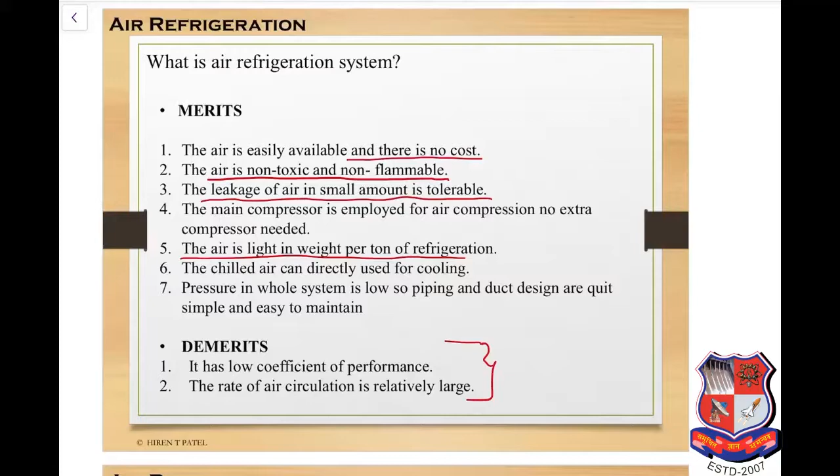So these are the merits and demerits of air refrigeration systems. Now there are different kinds of air refrigeration systems available. From the syllabus point of view, 6 systems are important: first, simple air cooling system; second, simple air evaporative cooling system; third, bootstrap air cooling system; fourth, bootstrap air evaporative cooling system; fifth, reduced ambient air cooling system; and sixth, regenerative air cooling system.

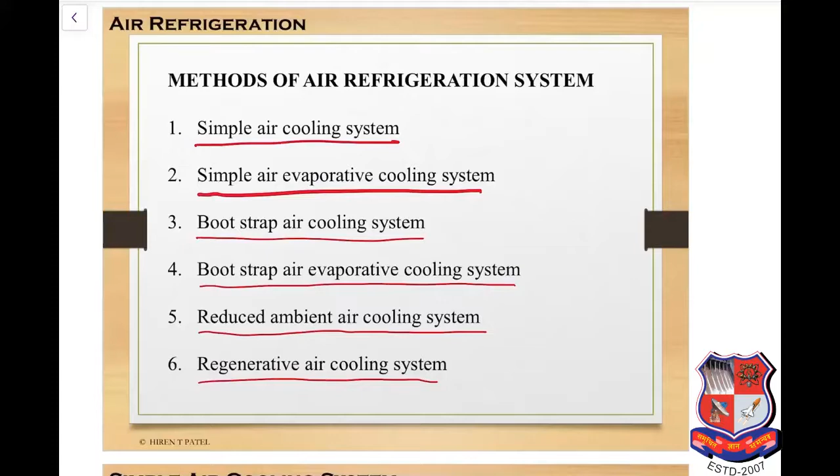The air required for the refrigeration system is bled from the main compressor. First, ambient air is passed inside the system, which is compressed by default in some amount, and that air is known as ram air. After that, air passing from the inlet goes to the main compressor where it gets compressed. From that air, some is bled to the combustion chamber and the remaining air is passed to the rest of the system.

The air which goes into the combustion chamber combusts there and passes to the gas turbine, where its pressure is reduced, so the work output can be obtained from the gas turbine, and that work is directly utilized for running the main compressor. The remaining air passing from the system is first passed to the heat exchanger, where it gets cooled by the ram air which is bled earlier, rejecting its heat to the ram air, and then forwarded to the cooling turbine.

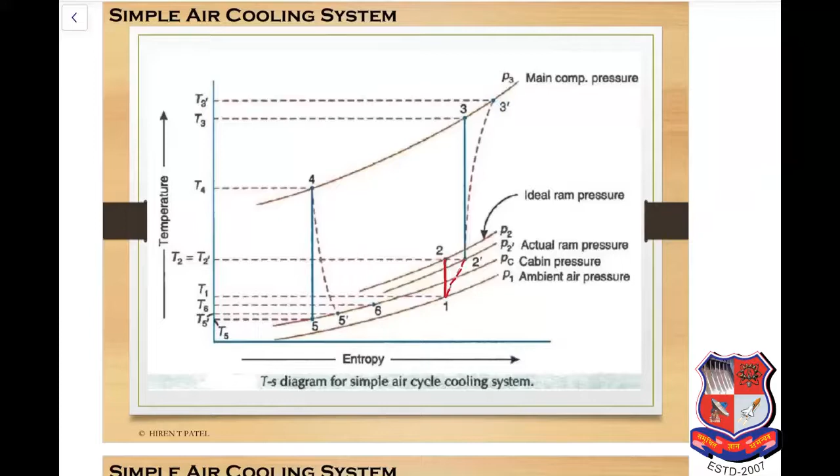From 2 to 3, this is the main compression process. So 2 to 3 is isentropic compression, during which there is no heat transfer. And for compression efficiency, there is 2 to 3 dash.

Then 3 dash to 4, that is the heat rejection process, which occurs in the heat exchanger. So in heat exchanger, 3 dash to 4 is heat rejection.

4 to 5, that is expansion in the cooling turbine. So 4 to 5 is isentropic expansion, and if there is isentropic efficiency of cooling turbine, then it is 4 to 5 dash. And 5 to 6 or 5 dash to 6, point 6 is cabin pressure and temperature. So here we can see the full cycle process: 1 to 2, 2 to 3, 3 to 4, 4 to 5, and 5 to 6.

Now each and every component has its own work. In the ramming process, if there is any efficiency, so it is not perfectly isentropic, then what happens? The temperature remains constant, but the pressure will be different. So instead of ideal pressure, there will be some actual pressure which is comparatively low than the ideal pressure.

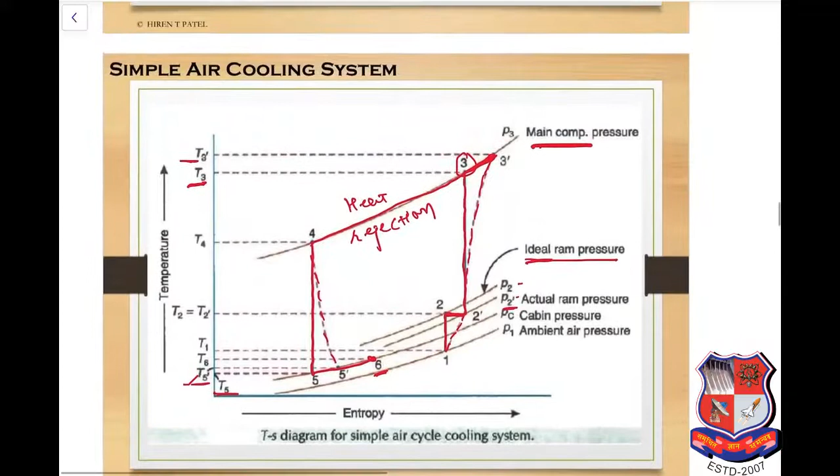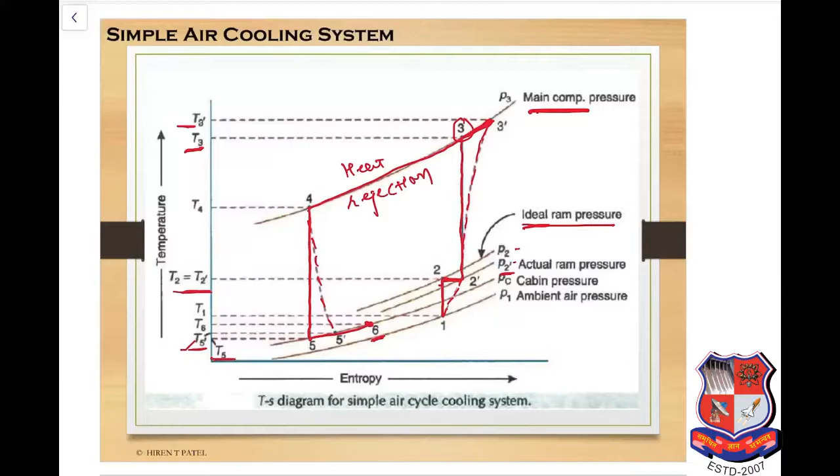Now as we have seen on the TS diagram that T2 is equal to T2 dash. So if there is ramming efficiency, then temperature remains same, only pressure will change. Remember, it is only for the ramming process. So T2 can also be written as T2 dash, and T2 by T1 can be replaced by T2 dash by T1. So T2 dash by T1 is equal to 1 plus v square by 2000 Cp T1.

Now we know that Cp minus Cv is equal to R, so we can derive the equation for Cp as well as Cv. Here we are deriving the equation for Cp, that is Cp is equal to gamma R upon gamma minus 1. You can see the process.

So putting this value of Cp into the equation, we are having T2 by T1 or T2 dash by T1 is equal to 1 plus V square gamma minus 1 upon 2000 gamma R T1, when R is in kilojoule per kg, when R is in joule per kg Kelvin. Now if we take R in kilojoule per kg Kelvin, then the equation becomes 1 plus V square gamma minus 1 upon twice gamma R T1.

Now, as we know, velocity of sound, that is A, is equal to under root gamma R T1. So gamma R T1 can be written as A square. So our equation becomes 1 plus V square gamma minus 1 by twice A square.

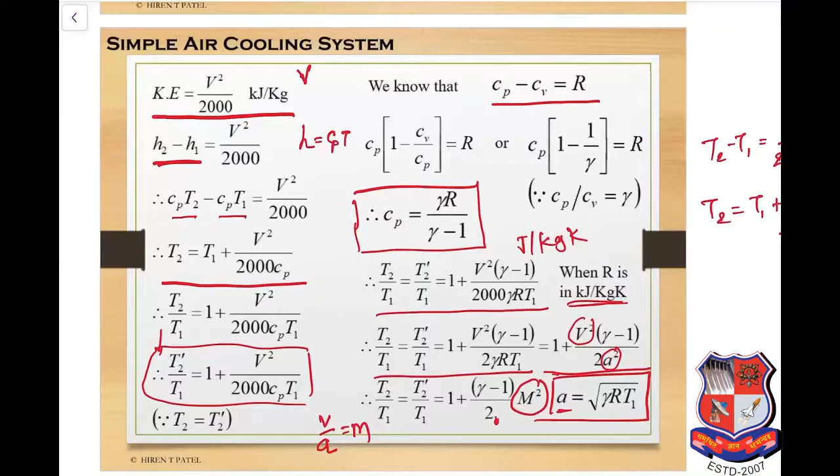So the efficiency of ramming process can be written as P2 dash minus P1 divided by P2 minus P1.

Compression work can be written as MCP delta T, that is equal to MACP T3 dash minus T2 dash. And turbine work which we are obtaining, WT is equal to MCP delta T, that is MCP T4 minus T5 dash. Heat rejected during the process 3 to 4, that is MCP delta T, that is T3 dash minus T4. And refrigerating effect produced or heat absorbed, that is MCP delta T, MCP T6 minus T5 dash.

So COP can be written as refrigerating effect divided by work supply, that is MCP T6 minus T5 dash divided by MCP T3 dash minus T2 dash. So T6 minus T5 dash divided by T3 dash minus T2 dash.

Or COP can also be written in this manner. If capacity is given, then it is written as 210Q divided by MACP T3 dash minus T2 dash, or MACP T3 dash minus T2 dash is also power into 60. So power is equal to MACP T3 dash minus T2 dash by 60 kilowatt.

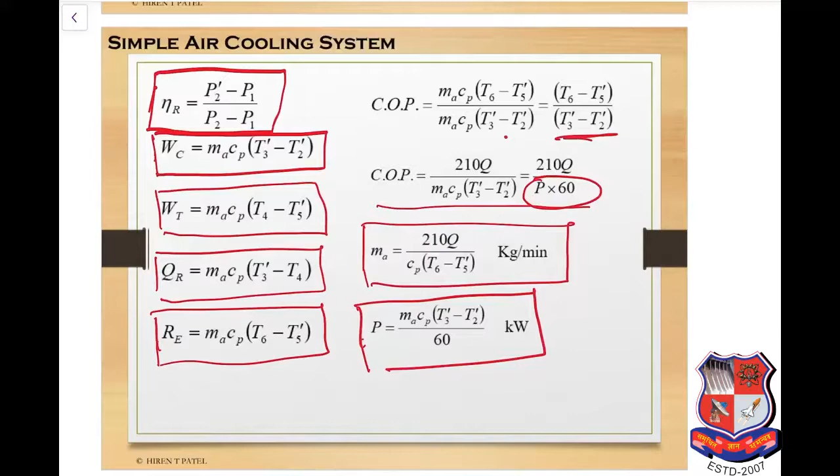Now the second system is simple air evaporative cooling system. There is no much difference between simple air and simple air evaporating cooling system. If we can see here, the whole diagram is same. The simple air cooling system as well as the simple air evaporating cooling system, both are nearly same.

Only the difference is the introduction of evaporator in between the heat exchanger and cooling turbine. So the additional cooling is produced by this evaporator after the heat exchanger before entering the cooling turbine. So air before entering the cooling turbine loses its heat in the evaporator. In the evaporator, some different kinds of evaporative medium or material is provided for the additional cooling purpose.

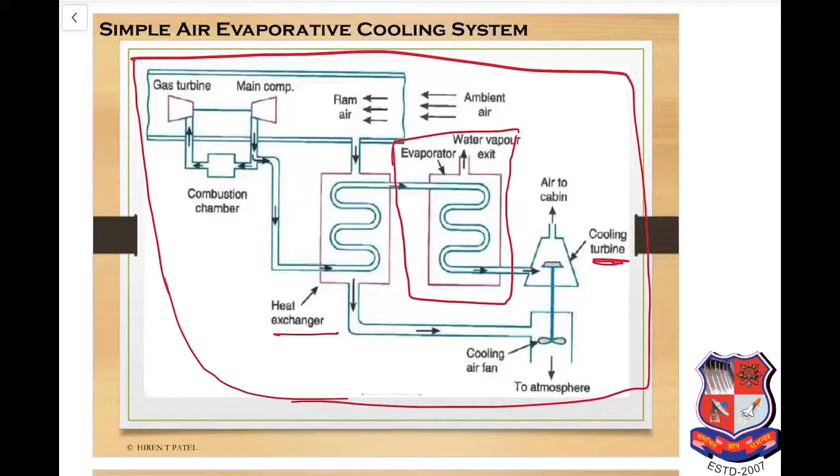So the additional heat is rejected inside the evaporator. So in the TS diagram there is also not much difference. As we can see, the TS diagram is nearly the same as simple air cooling system. Only the difference is that our point 4 is extended to point 4 dash. Here we can see that 4 to 4 dash, that is the additional cooling or additional temperature lowering, or we can say additional heat loss inside the evaporator. So here this process is denoted by 4 to 4 dash.

So earlier in simple air cooling system we are having temperature T4 after the cooling of air inside the heat exchanger, but after introducing the evaporator we are having T4 dash. So the temperature is reduced from T4 to T4 dash. So ultimately we are having less temperature at T5, or we can say T5 dash, compared to the simple air cooling system.

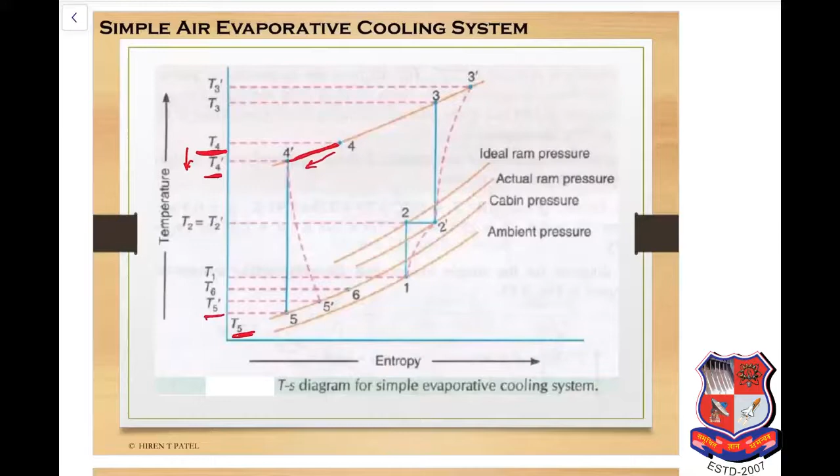So in simple air evaporative cooling system the difference is only that the temperature we are obtaining is less before entering the cooling turbine. So air has less temperature compared to simple air cooling system before entering the cooling turbine. The equations for COP are same as simple air cooling system, and mass of air required is again same as simple air cooling system.

Also, the mass of evaporant medium that is required before starting of the flight is equal to QE into T by HFG, where QE is the heat to be removed in evaporator in kilojoule per minute, T is the flight time in minutes, and HFG is the latent heat of vaporization of evaporant in kilojoule per kg. So only latent heat is rejected. Additionally, we have to remember the mass of evaporant required inside the evaporative system instead of MA, where MA is the mass of air required for cooling inside the cabin.

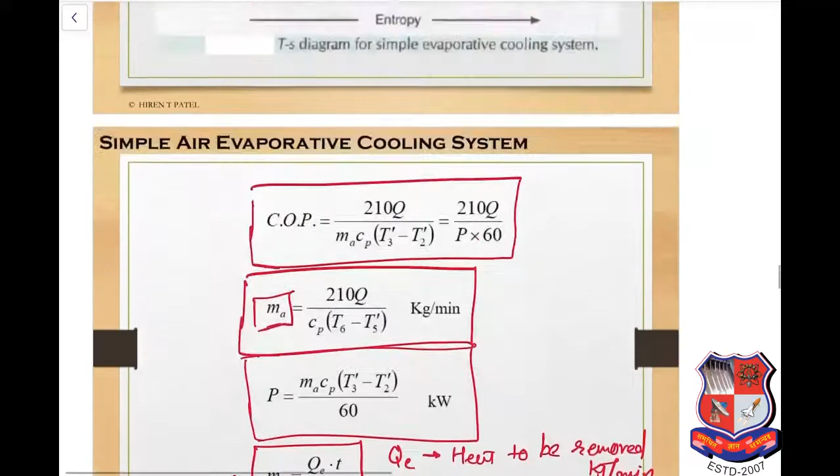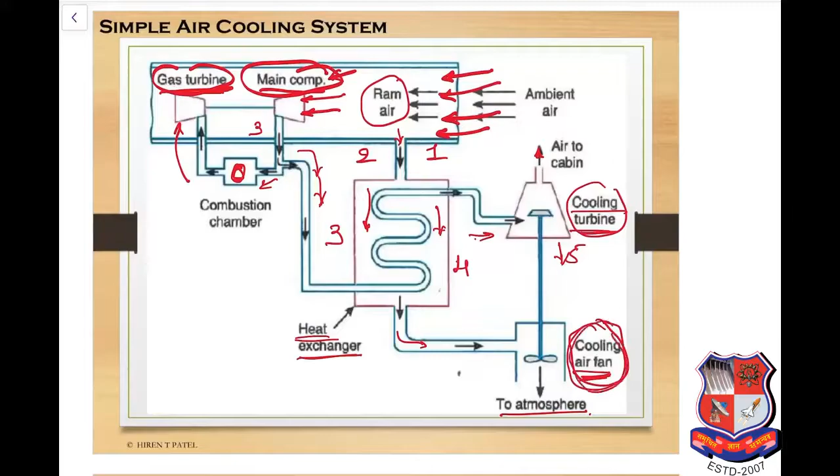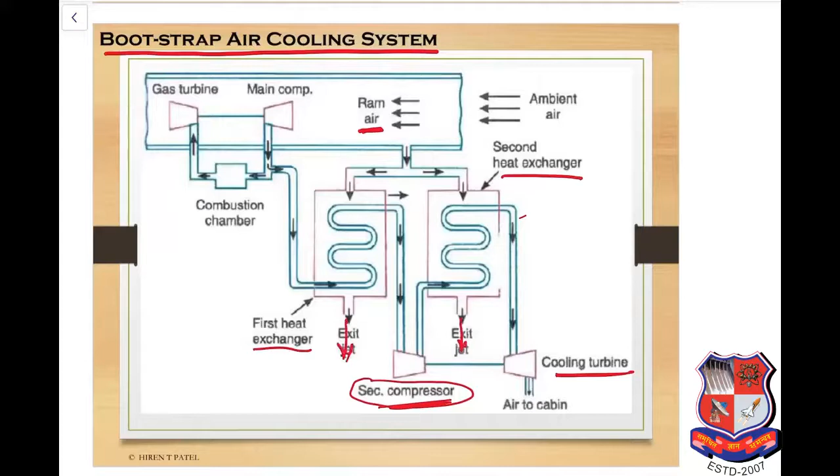Then it again passes from the second heat exchanger where it gets cooled, and then passes to the cooling turbine. In simple air refrigeration system, the power produced from the cooling turbine is utilized for running the cooling air fan. Same as in the evaporative system. But in bootstrap air cooling system, the power obtained from the cooling turbine is used to run the secondary compressor as well as for the exit jet for the cooling fan, while the gas turbine is for the main compressor. Again, only the power required to run the main compressor is counted, since the power used to run the secondary compressor comes from the cooling turbine and does not count for input purpose.

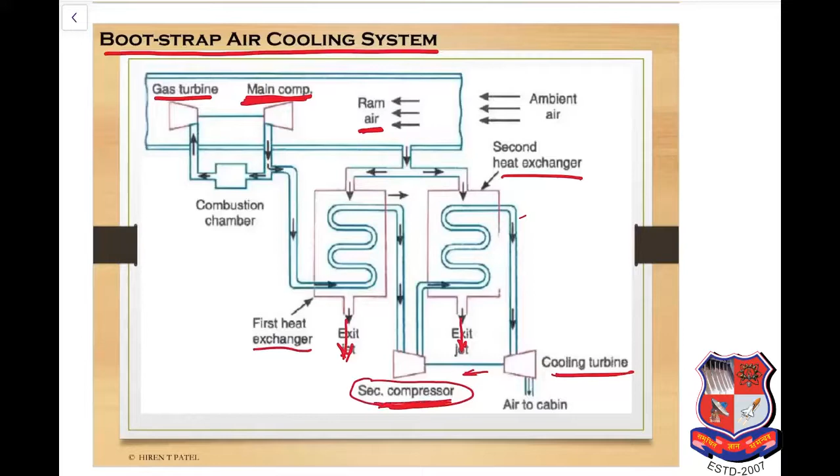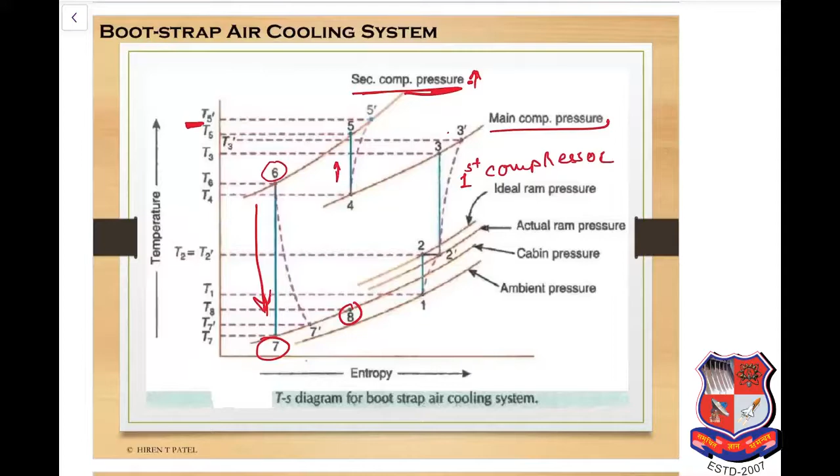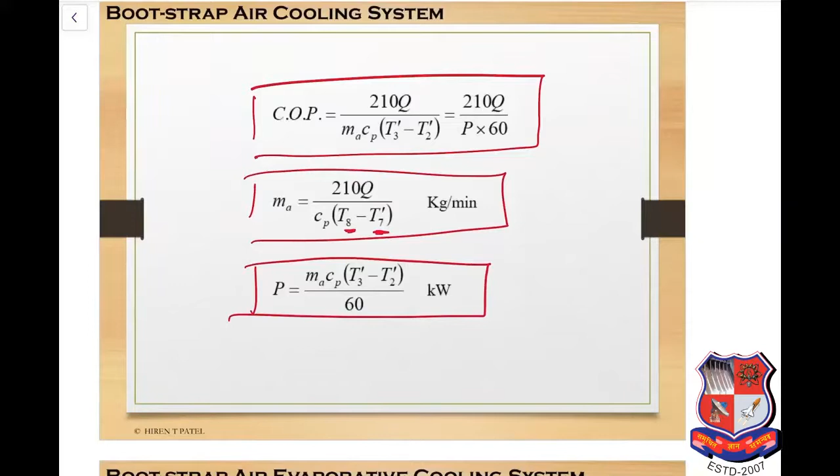So what is the difference in calculation? The COP remains same, but the change is in mass of air, only the digits are changing here as per the TS diagram, that is 7 to 8 process is for obtaining temperature and pressure for the cabin. So here Cp into T8 minus T7 dash, and power is same. So basically all equations are nearly same for all air cooling systems, each having the same equations, only the digits change as per the TS diagram. If we can draw the TS diagram, the equation becomes easier.

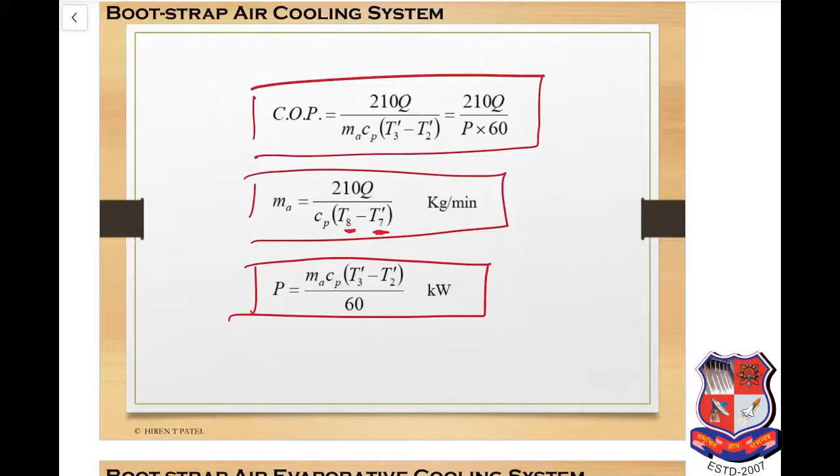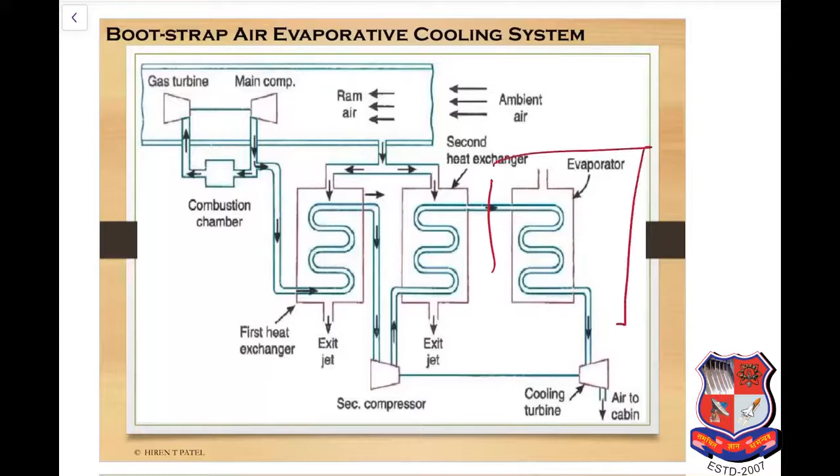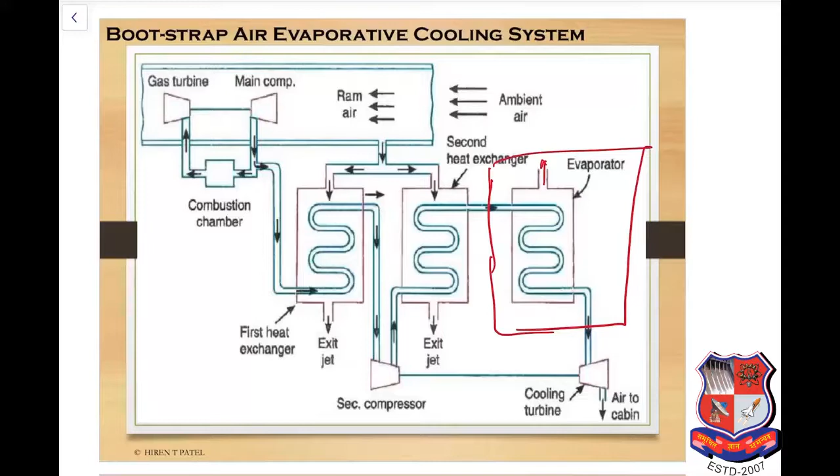Now the modification of bootstrap air cooling system is bootstrap air evaporative cooling system. As we have seen the modification of simple air cooling system with simple air evaporative cooling system, same way in bootstrap air evaporative cooling system, an evaporator is attached in addition to the two heat exchangers. Evaporative medium is there, and additional cooling is produced by this evaporator, so instead of T5 dash we are having T6, that is T5 double dash to T6. This is the additional loss of heat we obtain with the help of evaporator, as we have seen in the previous system, that is simple air evaporative system.

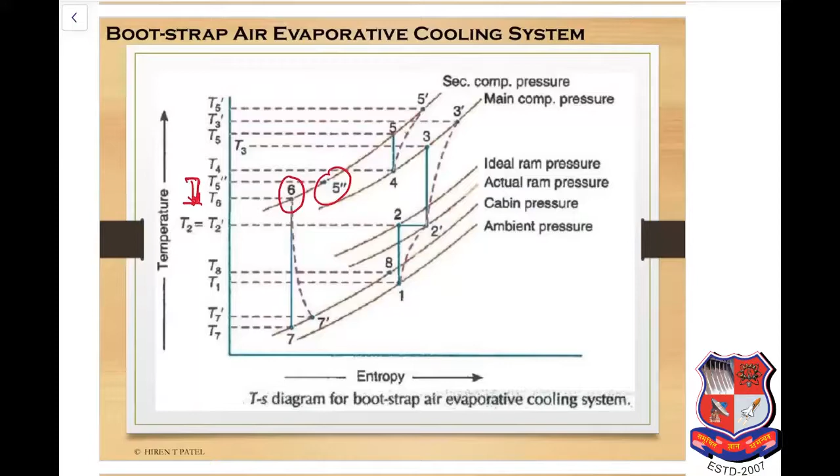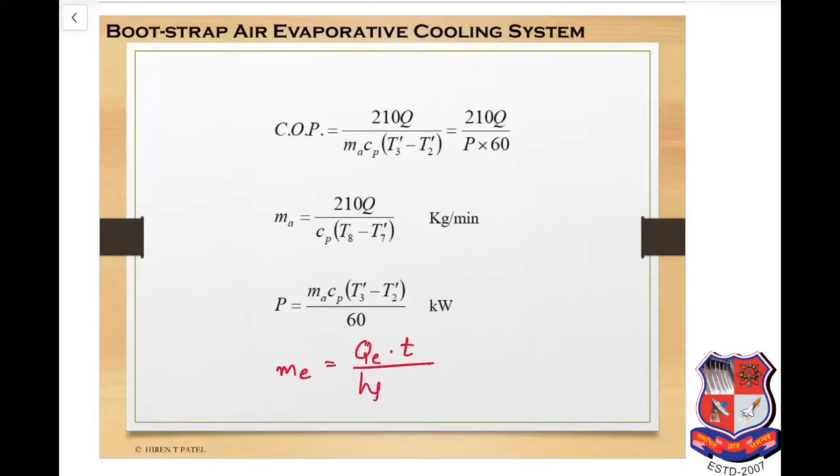So here also we have mass of evaporant, that is QE into T by HFG. Again QE is the heat to be removed in evaporator, T is the flight time, and HFG is the latent heat of vaporization of evaporant.

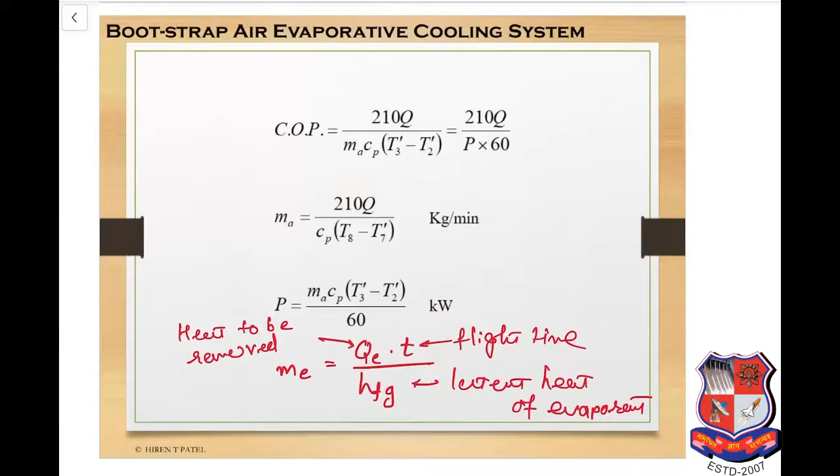Next system is the reduced ambient air cooling system. Previously, whatever heat exchanger cooling air was obtained from the RAM air, we were bleeding air from the RAM air for cooling the main air inside the heat exchanger.

But in case of reduced ambient air, this RAM air is first cooled by the first cooling turbine, and then this air cools the main air which is going to be supplied to the cabin.

So what happens in this case? The temperature obtaining into the heat exchanger, or the effectiveness of the heat exchanger, is going to be higher compared to the simple or other system. So comparing to the simple air cooling system, the reduced ambient air cooling system has higher effectiveness of heat exchanger.

As we are first cooling the RAM air inside the first cooling turbine, this air is going to cool the main air which is coming from the main compressor and which is going to be supplied to cabin. So this main air passes to the second cooling turbine, producing cooling effect to the cabin, and air is supplied to the cabin.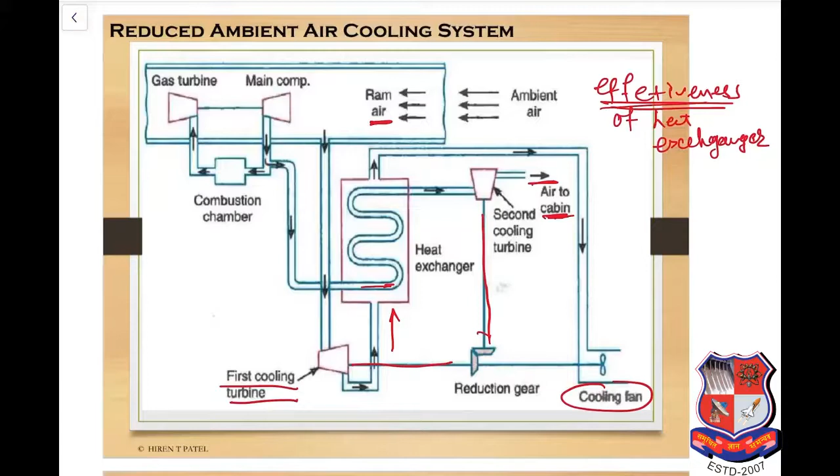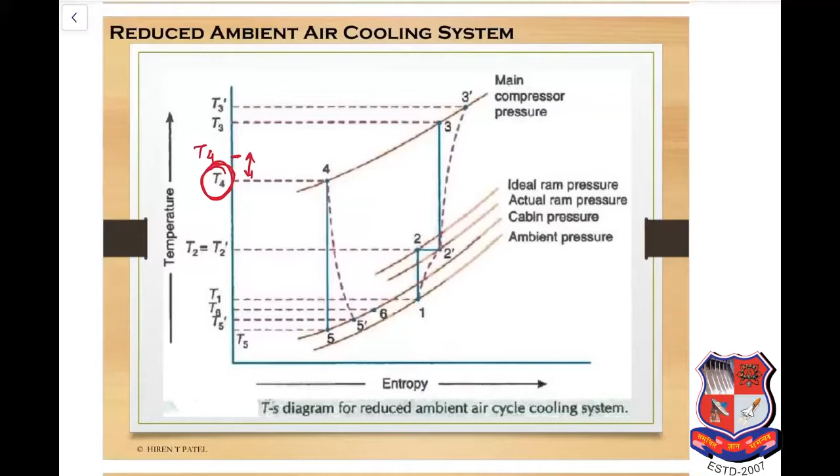So in the TS diagram, the diagram is same as simple air cooling system. The difference in the diagram is the temperature T4. In simple air cooling we have T4 nearly about here, but right now we are obtaining T4 here, so we are having more lowering of temperature when air exits from the heat exchanger.

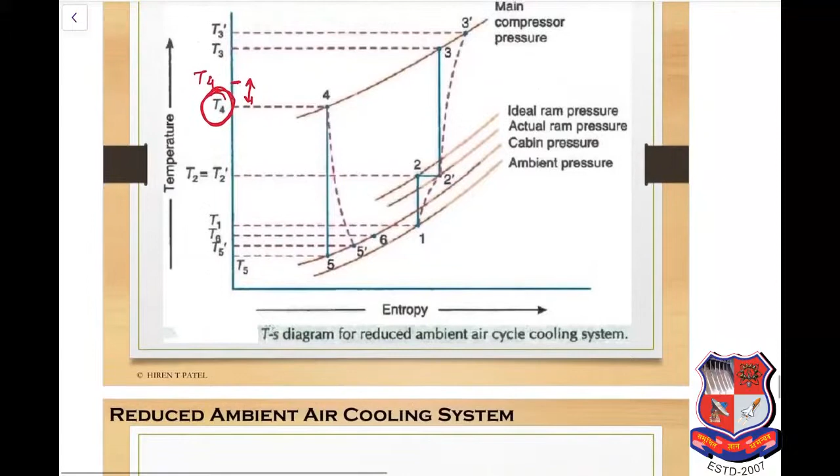And as I have said, the calculating equations are same for the COP, mass of air required, and power.

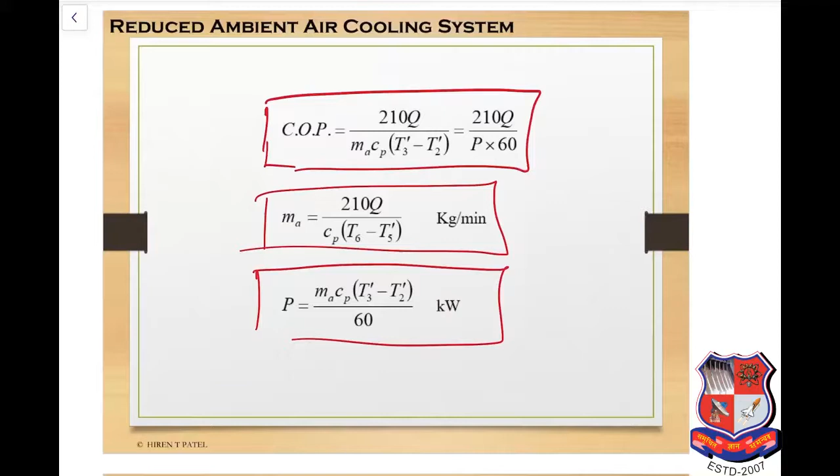Last but not least, the last system is the regenerative air cooling system. In this case there is a different modification — it is an addition. Additional cooling is produced by the air which is going to the cabin.

In this case, same as bootstrap air cooling system, we have two heat exchangers, first one and second one. In the first heat exchanger, the air is cooled by RAM air, same as simple air cooling system. But in the second heat exchanger, also known as regenerative heat exchanger,

the air is cooled by the air which is passing to the cabin. This air is bled and supplied to the regenerative heat exchanger, meaning whatever air is going to the cabin is bled for the cooling purpose. So the amount of air going to the cabin is less compared to other systems, but the cooling of this air is more compared to the simple air cooling system or bootstrap air cooling system.

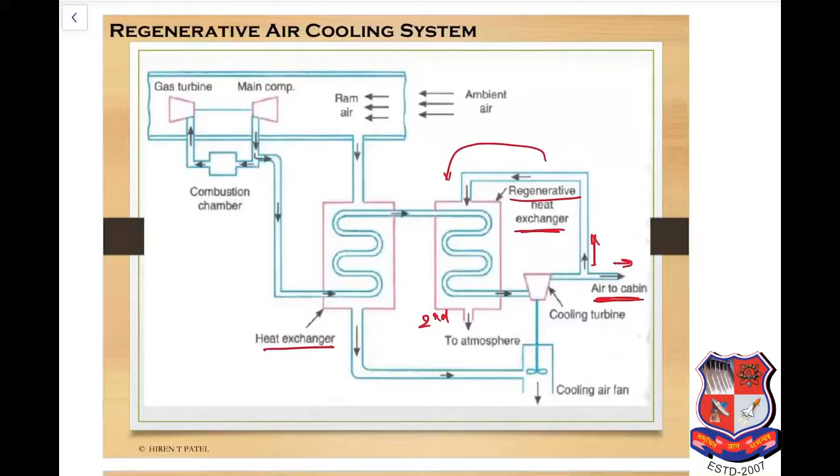So what is the difference in the TS diagram? The TS diagram is the same, but the temperature difference between T7 and T6 is more compared to other systems, so it is providing more cooling effect.

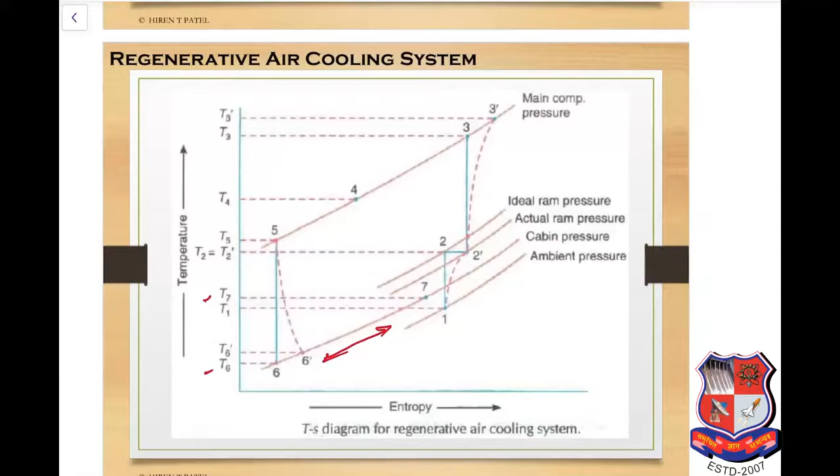So the calculating equation for COP is the same. Mass of air is same as the others, but M2 is different. Here M2 is the mass which is passing through the cabin, and Ma is the total air which is passing to the compressor, the main compressor.

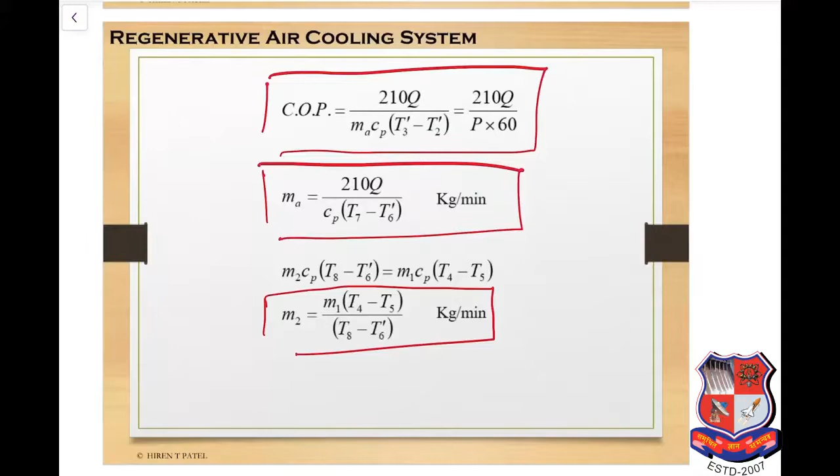One method of overcoming the drawback of the bootstrap system is to use part of the work derived from the turbine to drive a fan which pulls air over the secondary heat exchanger. As we discussed earlier, the power obtained from the cooling turbine is utilized for running the cooling fan, which produces a suction effect inside the heat exchanger, so an induced draft is produced.